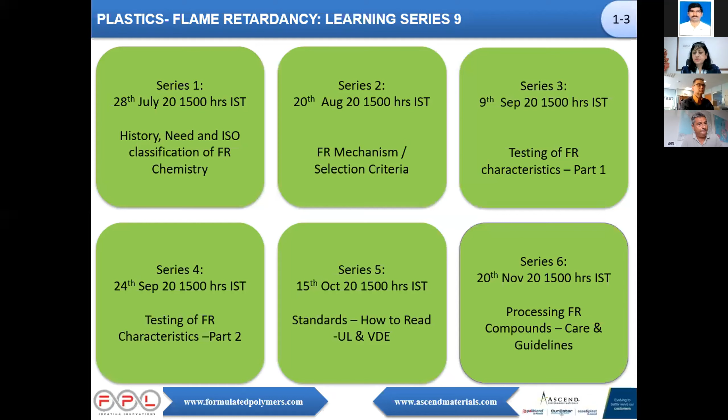This webinar, like we said, is a knowledge sharing platform for experienced professionals or professionals who are working hands-on in these specific areas. Just to do a quick recap, we have already done all these 6 series where we talked about introduction, the FR mechanism, various testing methods, the standards, the processing of FR compounds. We also had a discussion in terms of the design perspective, like what are the care or what features have to be taken into consideration when we are designing any component for flame retardant compounds.

And then the environmental impact. It's very important that we take care and ensure REACH and RoHS compliances. Possibly India is not as stringent as Europe or the US. But I think that part is going to change very soon. And since there is a huge amount of awareness which has been created, there will definitely be changes. And we see them coming. We see the coordination from various teams, systems.

This session right now is crosslink polymer FR systems, which we are discussing now. And then the next series will be on the applications, subsequently certain secondary operations, where we'll be discussing with the various team members what are the cares, precautions, and what is the process for ensuring that we have good laser marking, no color change, etc. And finally, we will be having the last session where we'll be covering the future trends in the FR system.

Just to quickly go through this, I'm covering this for the people who are attending for the first time, because we have certain participants who joined fresh. Even Miguel has joined for the first time in this session. So I'll quickly share with him what we've been doing and how he has come into the picture. We started off with the history in terms of why fire accidents happen, and why we reached the stage where flame retardant plastics are being used for certain applications. So we talked about the history, the reasons, the ISO designations. This is available on the YouTube link, so anyone who's missed out can quickly go there and see this session.

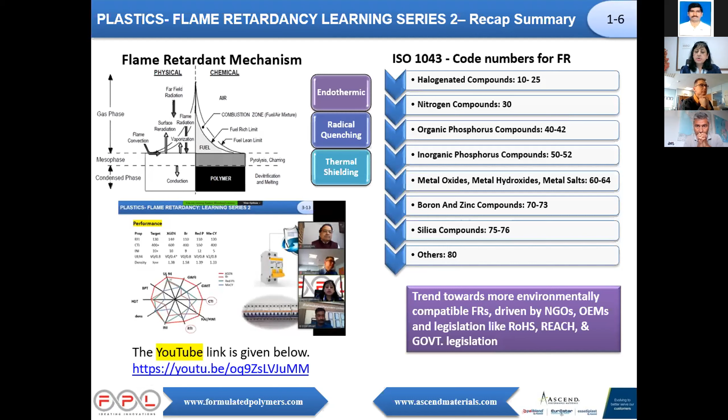The second was on the flame retardant mechanism, where we discussed various physical and chemical reactions, the endothermic, the radical quenching, the thermal shielding, basically different materials. There were different systems for flame retardancy and the trend towards more environmentally compatible flame retardant systems. So it was critical as we moved away from the halogenated systems, we go for the red phosphorus free and then move forward to the organic phosphorus or some of the other compounds which are now being used.

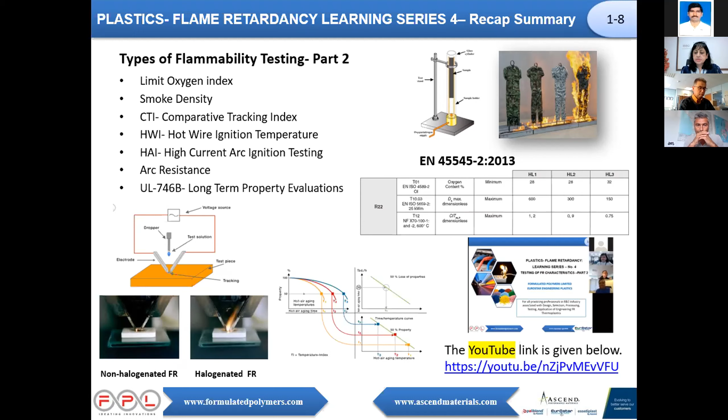Then we had one where we discussed standards. Since there is a very low level of awareness of how you read the UL, how you read the VDE cards, etc., Pankaj Chaudhary, the country head from VDE, joined and presented the session, along with Prasad Shankarappa, the UL principal engineer from Underwriters Laboratories. We had the next session where we talked about processing FR compounds: what are the care and guidelines which have to be taken into consideration when we are processing.

So how is it that our customers evaluate? How is it that the OEMs assess? And then what is important when we do the processing of the FR compounds?

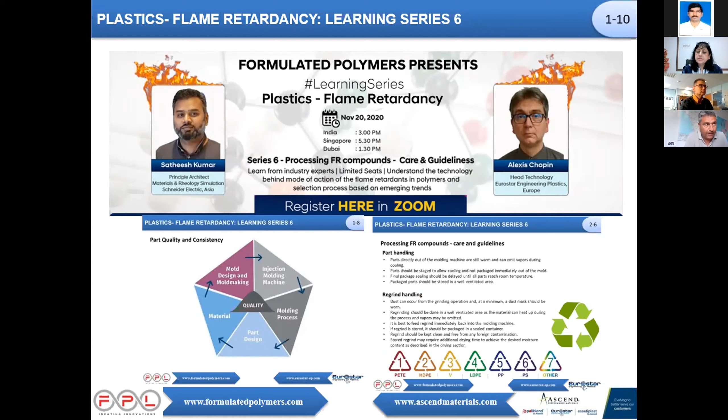Satheesh Kumar, Principal Architect, Materials and Rheology at Schneider Electric Asia, presented along with Alexis, Head of Technology at Eurostar Engineering Plastics. After processing, we had a session on the design perspective, why a particular design is important, and how with new technologies we can modify and optimize the design, looking at aspects like miniaturization.

How do we reduce weight as far as automobiles or various transport systems are concerned? So we had a session where Pradeep Chaudhary from Design Plus presented, along with Prashant Viragi, Senior DGM Plastics, L&T Division of Schneider Electric.

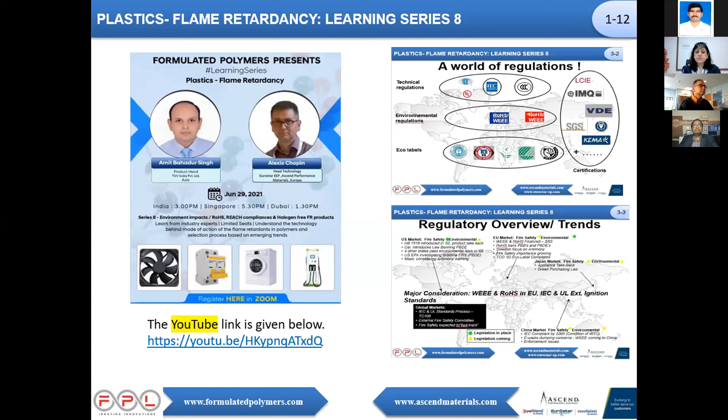Then the last session talked about regulations, a lot about REACH, ROHS, why they are important, and what factors have to be considered, especially for the export market and even the domestic market, as these regulations are becoming more and more important. Here we had Amit Bahadur Singh, the product head for TUV, presenting along with Alexis.

And now we come to the present series. This is series 9, about Crosslink Polymer FR systems. For this particular series we have 3 presenters, and cross-linking is new technology, new innovation.

We look at this in terms of our materials, the materials being used by Formulated Polymers Limited, Ascend Performance Materials, and radiation support from IONISOS. I would like to introduce the three presenters now.

The first presenter is Mr. V. Shekhar. He's a polymer engineering graduate with a Masters in Business Administration, has around 36 plus years of experience in formulation, compounding, and application development for technical parts. After a brief work experience, he co-founded Formulated Polymers Limited along with Mr. Mohan, and the rest is history.

The way the organization has grown is something to look forward to as a benchmark, growing from a small organization to one of the key engineering plastic manufacturers in the country.

He's the immediate past chairman of the Governing Council of the Indian Plastics Institute, a professional body with more than 3,000 members. He is also a Governing Council member of Plastindia Foundation, past president of the Tamil Nadu Plastics Manufacturers Association, and past Governing Council member of CIPET, the board which does testing all over India, and has research programs also now.

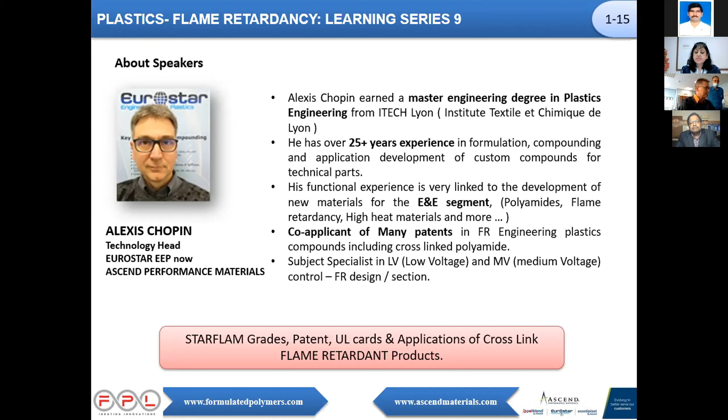He will be discussing STARFLAM grades, the patents, the UL cards which are available, and the applications of Crosslink flame retardant products.

Third speaker for today's session is Miguel Morales. He has a bachelor's degree in physics and an MBA, has over 20 plus years experience in the irradiation business, working as general manager in IONISOS, the Spanish subsidiary of the group, and now moving to the new role of sales and marketing director.

IONISOS is one of the leading European companies in the field of industrial irradiation, offering its services to plastic, medical devices, and industrial institutes as well as organizations across Europe. They have multiple locations, and Miguel will be sharing more information regarding that.

He will be discussing the principles and potential of radiation processing of polymers, and the irradiation facilities available with IONISOS. I'll now hand over the session to Mr. Shekhar to start with the presentation.

Thank you, Rashmi. Maybe I can present my paper now. Should I stop sharing? Yeah, okay, I'm stopping share. Is it visible? Yes, it's visible, but I think this is the last slide. Oh, you're starting. Okay.

Yeah, now this is it. Yeah.

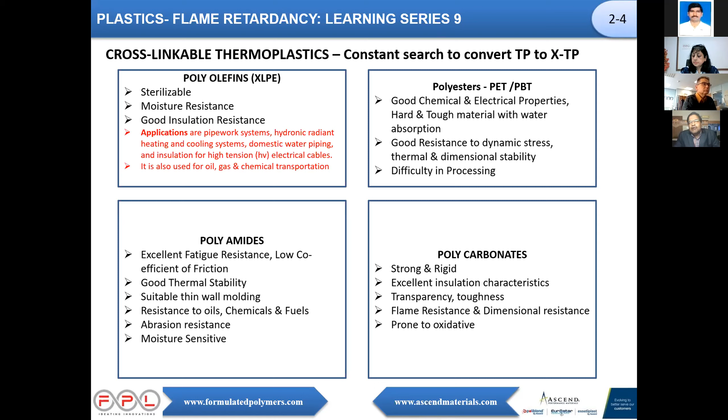The most popular method by which this cross-linking can happen is thermal, that is, by increasing the temperature, the molecule reacts and forms a cross-link. But unfortunately, the problem is this molecule will start reacting at a particular temperature, so the process window is very small, and within that time you have to process the material. If you are a little premature, then probably the gel formation will be more, and getting the required part will be very difficult.

Chemical: you can add a chemical or create a site in the molecules which can react, and by changing the pH, or in the presence of some chemicals, these cross-linkings are also possible. These were all tried earlier, but due to environmental reasons and many other reasons, these are not very popular even now.

So then radiation came, and this can be done with or without a crosslinker. The crosslinker can be inside the compound, or it can react in the molecule itself, and you can form a crosslink. There are specific energies under which these molecules will open up and form the crosslink, with absolutely no influence on processing. This is complete, like laser marking, like pad printing, you name it, like painting - it's a secondary process. You complete the process and then you can do cross-linking as a separate step.

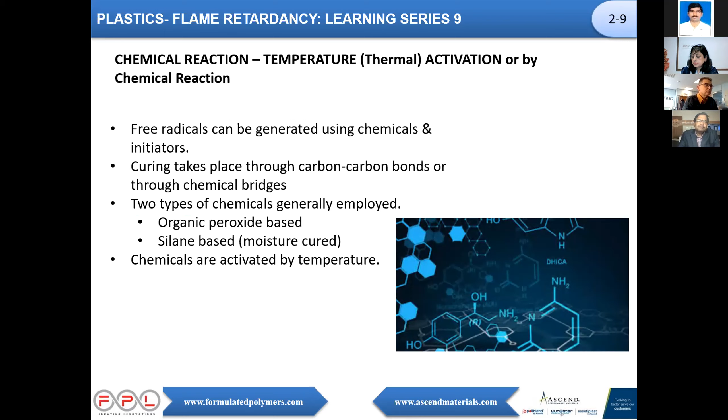Radiation - I think we have got a specialist speaker to talk about this. So there are a lot of irradiations possible, like alpha particle, beta particle, high energy electron beam, photon, neutron, you name it - I think whichever can create energy is possible. Even smaller ones like microwave, infrared, X-rays, gamma radiations are also possible to create this reaction of crosslinking.

There are many applications for which this crosslinking is being used. Maybe the common thumb rule is you want a thin part, and at the same time, the part should not melt in the application. In the application, there can be a sudden spike of temperature - you don't design for that, in the sense that no material can be designed for a very small spike, but that spike can spoil the part. And the part should be thin. If it is thin, thermosets are very difficult because they may not have the same ductility or impact as thermoplastic. Moving parts, for example in contactors, the bridges, are normally very popular in low voltage applications.

Lead-free soldering - today, with the ROHS restriction, people are giving up lead and want to go to lead-free soldering. And when you go to lead-free soldering, the temperature goes up. When the temperature goes up, the pin doesn't stay on the part. I think all the parts which have been shown here, where soldering is very important, are where you have to go for the base part to be cross-linked.

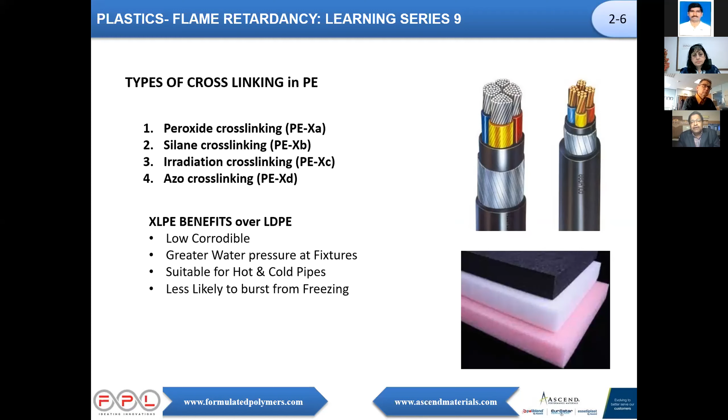And in FPL, we have FORMPOLY-X, which is a cross-linked series. And we have a few grades in nylon 6 and nylon 66, with glass, without glass, with flame retardant, without flame retardant, available. Maybe you can go to our website, you should be able to see these products.

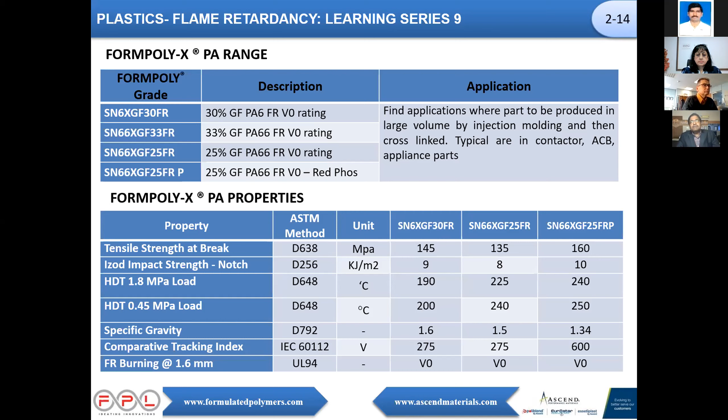And of course, we also produce STARFLAM Crosslink here with a licensing from Ascend. And there are a few customers who have started using this product in Asia in a big way now. FPL has won some innovation award for this cross-linked polyamide innovation, and we also have patents on this product for Asia.

Cross-linked polyamide from Poly X can be cross-linked using electron beam radiation, as well as by gamma radiation process. What you get out of the product is a significant improvement in RTI and multifold increase in hot wire ignition temperature, improved wear resistance, and improved chemical resistance.

The material doesn't react that quickly, even in strong chemicals. And hot pin penetration performance improves.

You can maintain most of the basic characteristics like flame retardancy. This characteristic of flame retardancy, combined with reduced creep under load because of the crosslink, allows high temperature performance above TG, and improved dimensional stability under load. So these are some of the advantages.

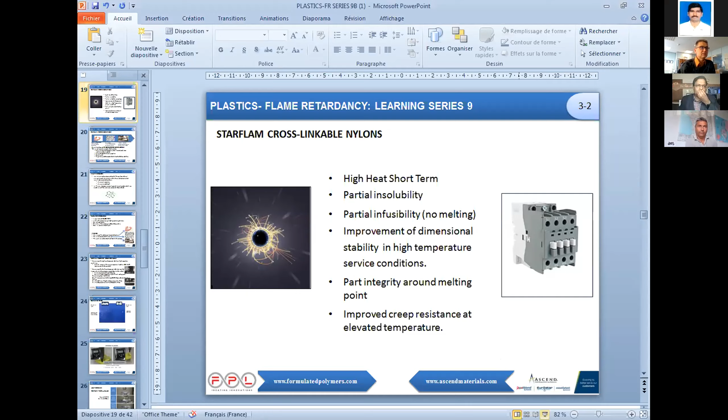So today is a practical webinar. I will share a bit of what we know, what our customers are doing, and how to work with it on a very practical level. We will not go into detail of chemistry, but what it can bring and what we can do. When customers are asking, what can we do? It's high heat, short term, extreme temperature for a short period of time, or a material that has to withstand conditions we are not forecasting in the beginning. Let's say it's the best material under failure, under extreme conditions. So what does it bring practically? High heat short term - we will see in the next page what it means.

Insolubility - in some cases it's important, especially because if you are trying to measure the solution viscosity in formic acid or sulfuric acid, you simply cannot do it because it's insoluble, and it's the way you are measuring the crosslinking percentage.

Infusibility is a real advantage in electrical application, and in some cases you have improvement in dimensional stability, especially in high temperature service conditions. It really improves the creep resistance and the integrity of the part, and it keeps the integrity of the part around the melting point, meaning it's a single material that can work so closely to its melting point. Creep resistance at elevated temperature finds more and more application, especially in automotive now.

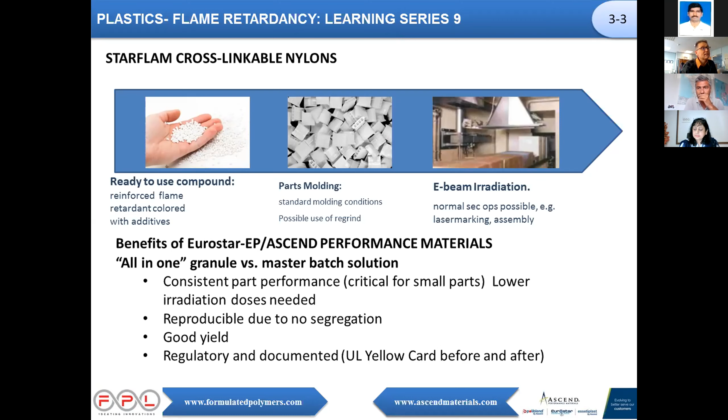The unicity of our offer is that our materials are one pack, as explained - ready to use, meaning no variation - and they are very well covered by UL certificates. UL certificate, for those not so familiar, is a kind of warranty given by an outside, independent company that certifies the performance of the material for flammability, electrical property, and mechanical property. The good thing is that they warrant this material before and after irradiation, and this gives the possibility to optimize performance and optimize cost.

So what is irradiation? What is ionization? I will not go too much into details, but basically you are bombarding your part with very high energy, and this high energy interferes with the polymer chains.

This takes place at room temperature, so it's not a very harmful treatment for the product. And what happens is that, of course, this energy breaks the chain. And there is a competition between breaking the chain and creating a network.

And the know-how of Ascend and FPL is to find also the suitable additive in a suitable amount to create this network. Meaning that once the chains are broken by the irradiation, a molecule which is polyfunctional is reacting to the entities that are created to create this network. And this is all about crosslinking.

So once more, to make things simple, crosslinking is really applied on molded parts. It can even be applied on assembled parts, meaning that if you have a box and a cover, it can be assembled. It can be made directly on packaging. So subcontractors doing the irradiation do not even have to open the cardboard box.

They do not have to manipulate it. They just manipulate the cardboard box. So it's a matter of sending them, irradiating them, and sending them back. It can be done in presence of metal and inserts.

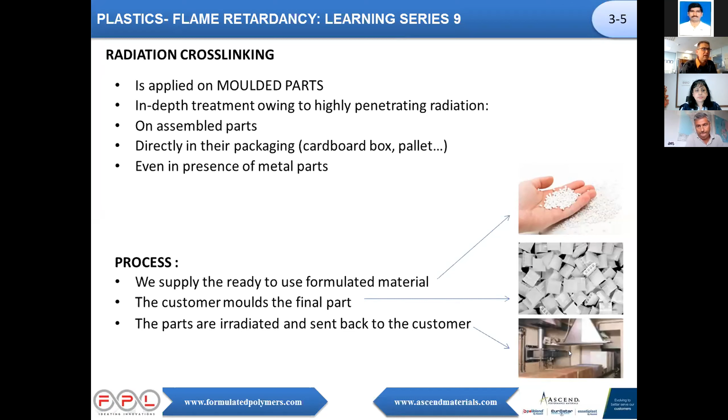So once more, supply granules in granule form, so nothing to be treated, injection normal way, and treatment normal way, and send back to customer.

So practically, how can we test that? How can we be sure that the material did react? Because basically you are not changing the shape, you are not changing the weight, you are not changing sometimes the core, you are just sending some parts outside and receiving them back.

So for this one, a very simple test is what we call the hot pin test. So basically you have this pin, which is applied to a specimen under a load at a certain temperature. To make that short: 350 degrees C, 1 kilo, 1 millimeter, and you apply it to the part.

What happens? If we see what happens on these pictures, on the left side you have a plate that has been tested, 350 degrees C, 1 kilo, and then what you see, of course, you are more than 100 degrees C above the melting point. So what happens, as you know, in plastics, once melting point is exceeded, the material melts down.

And you see here the print of the pin. It goes through the part. And if you look at the pin, the material is stuck to the pin. There is a hole formation.

And you see the same plate after crosslinking, you see that you just have a small print of the specimen, meaning that the material could withstand 1 kilo at 350 degrees C for a certain period of time without melting.

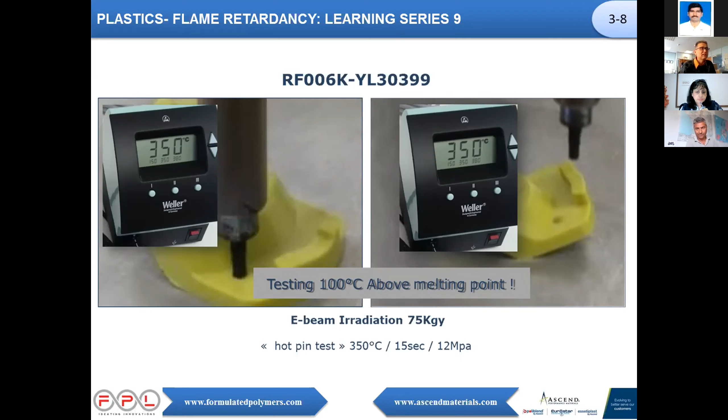So this is an industrial part on stream, and maybe you will see this small part in Miguel's presentation in a bag. Just to show that it's really high volumes, and it's important because today customers still have an impression that it's an exotic application process. It's no more an exotic process, and everybody is using it not only in appliances but also in automotive now.

So what can it bring practically to the product? Here you see a normal nylon 6/6 flame retardant. So we place in an oven a specimen that you can see here. When you place the specimen in an oven at 295 degrees C, it's still cold, you see nothing. After 1 minute, the material starts to deform. And then after 2 minutes, once heat takes up the plastic, it really melts away. Here you only have some drops of plastic somewhere.

If you take the same material cross-linkable, what do you see? If the material is cross-linkable but not cross-linked, you see that it already reacts, meaning that after 20 minutes, the material gets deformed, but it's no more in liquid form, meaning that already with the additive we place in, there is a reaction to heat. But if you cross-link the material at 100 kGy, what you see, even after 2 hours, the material gets distorted but maintains its shape. And this finds a lot of application, and it's really a clue that the material can withstand high heat for some time.

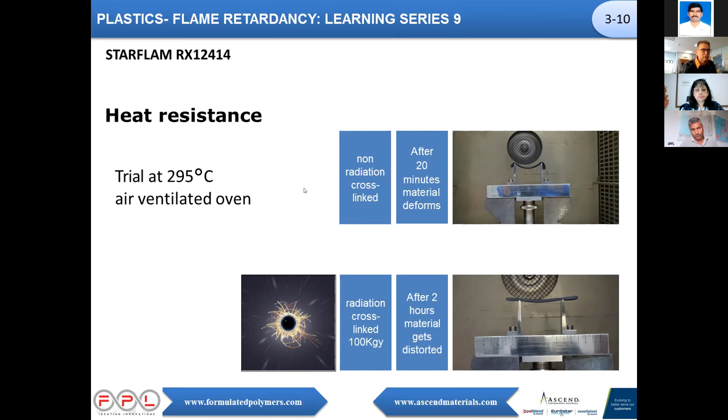Of course, we have other products which are more designed for E&E applications. This one is a polyamide 6/6 with glass fiber, flame retardant V0 with glass fiber. And you can see that you can finely tune the resistance of the material with the doses applied. You will learn in the next presentation, but of course the cost is linked to the doses applied. So you can finely tune the doses to your application just to fit the minimum of your needs to optimize cost.

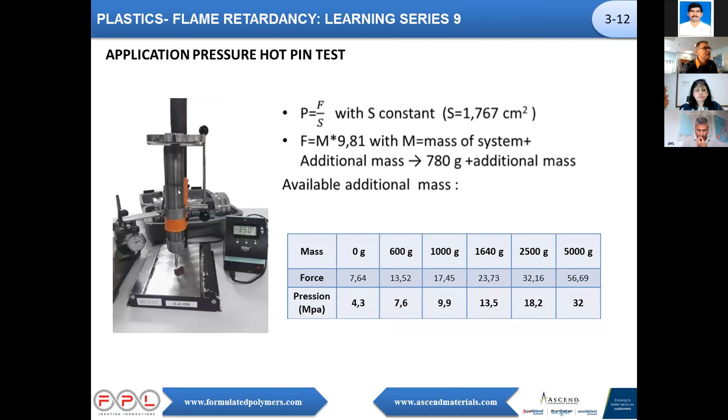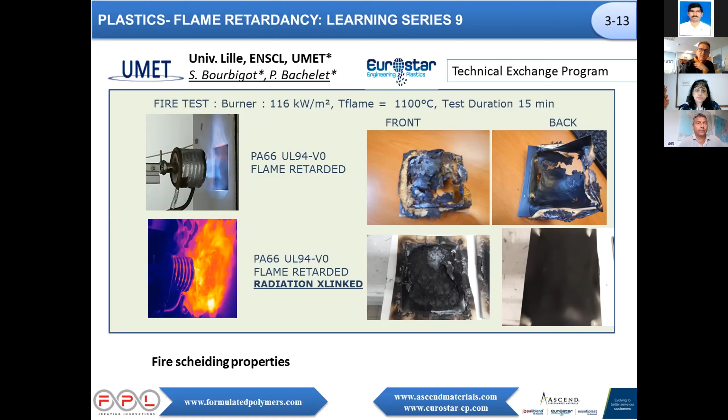Okay, so I'm already late, so I have to go fast as usual. So from this, we built a range. In our range, we have pure polyamides that are not flame retardant, just cross-linkable. We have products that are glass reinforced. We have products that are flame retardant and V0, typically for connectors. And we have some exotic materials. I will pass over them very rapidly.

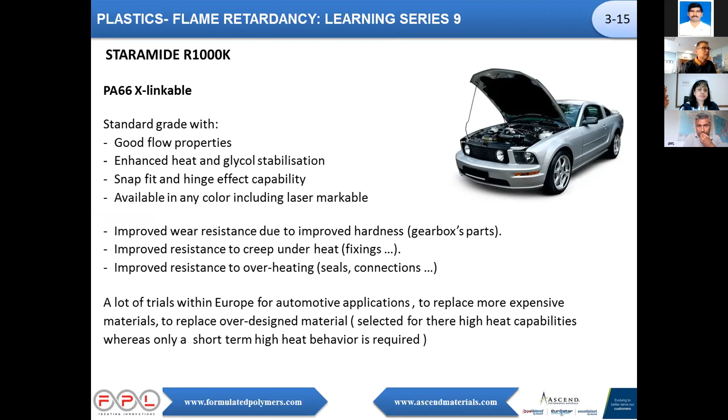So to make a long story short, R1000K, pure 6.6, just cross-linkable. Interesting if you have designed a part, for example, that needs to be quite soft. You are making some snap fit, you need a bit of flexibility, but under failure it's too hot and the material melts. This might be the solution, especially in the automotive industry.

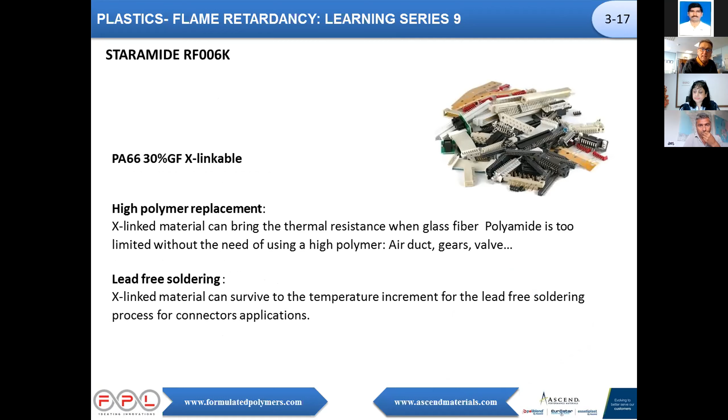Then if the material needs to be more stiff, needs to withstand more heat, more HDT, we have this polyamide 6/6 with 30% glass, which is cross-linkable, which finds use in automotive applications. But not only in automotive. You know, there are some connectors that are not flame retardant, they're only there to pass a kind of signal, but can fail under high heat. And then you can use this product too, of course.

It's important to say that it's one of the very few materials that can survive lead-free soldering, and on this one we can use snap fit and hinge. Most of the time you have to use very expensive material or thermoset, but materials that can survive hinge with lead-free soldering are not so common. And we have this one, it's very well covered by UL card, and it's in use by big OEMs for connectors.

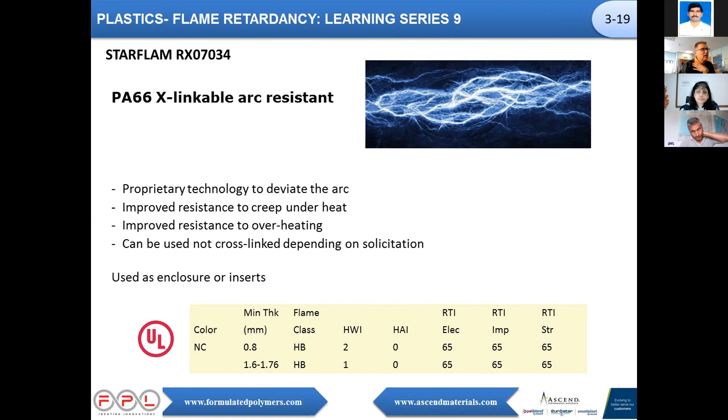Then we have this one, which is more a specialty. It's been designed mainly for arc chambers, and we take advantage of this high heat resistance, and we even designed a product that creates a kind of shield against the arc. So when the arc is bumping into the arc chamber side, you create a kind of ceramic that prevents the arc from flashing away and melting the plastics.

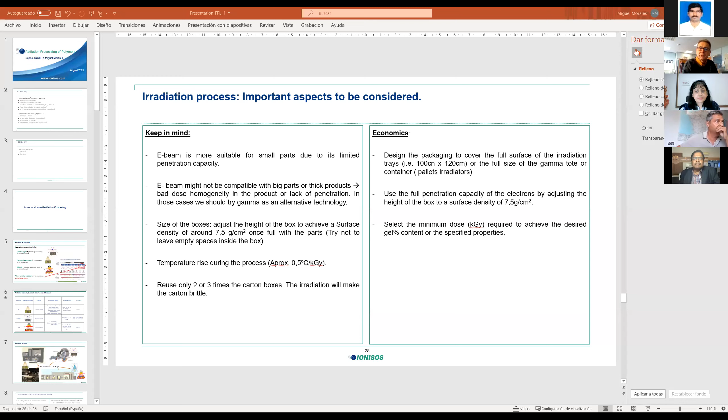Okay, so I'm almost done. I will pass over to Miguel, who will discuss the last part. And I insist, this is a very important part, because to succeed on such a project, it's a story that you cannot do alone, because you need the knowledge of people doing irradiation. You will see that even if you have a good material, if it's not irradiated correctly, you can spoil your material. So I will just pass over to Miguel.

Okay, thank you, Alexis. I'm going to share the screen. Okay, I hope that everybody can see the screen now. Is it? Yes, we can see the screen. Thank you very much. Can you put it on slideshow? It's already in a slideshow, no? Let me see. Okay, I mean, it's visible to me. I'm okay with this. Okay, I hope it's okay like that. Okay, thank you very much.

As said before, my name is Miguel Morales. I'm Sales and Marketing Director of IONISOS. IONISOS is an industrial service provider focused on the radiation business, mainly in the markets of medical device sterilization and cross-linking of plastics, pipes and tubes.

So I would like to give you an introduction about radiation processing. It covers the type of facilities and the basic interactions between irradiation and matter. After that, I will give you some information about the applications and, more importantly, the process conditions that we have to take into account to define the irradiation process of the plastics. I will finish with an introduction about IONISOS, the sites that we have in Europe, and some information about the company. So, okay, let's start.

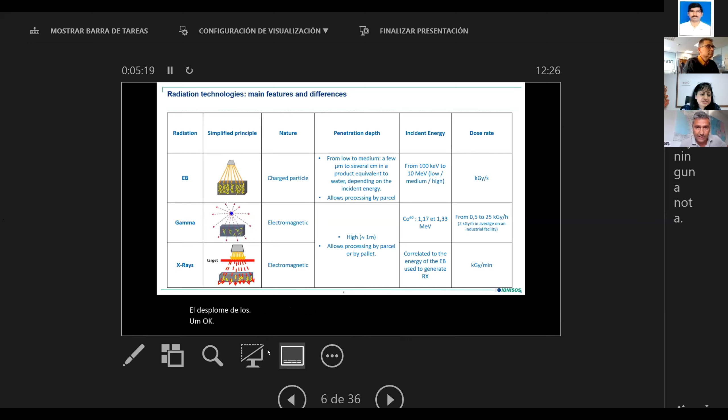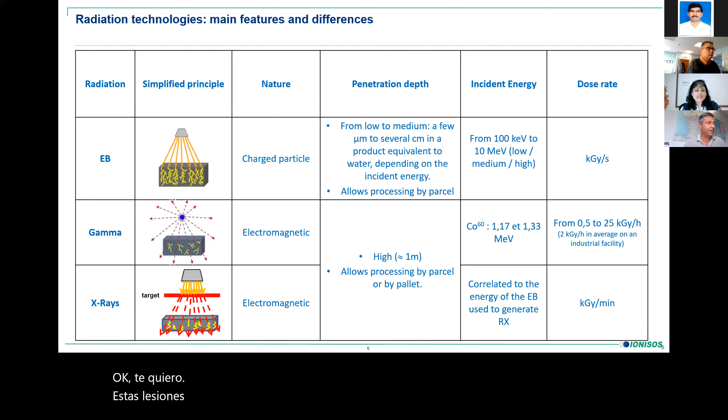Just a minute, Miguel, can you stop the translation which is coming at the bottom so that the screen is a little bit bigger? I'm getting a request from the audience. If you can just remove that translation, I think the screen will be a little bit bigger. Okay, let's see. Now we've gone to slide sorter. You'll have to go to slideshow. I'm going to start again. Yeah, now it's very clear. Okay, good, thank you. I don't know if the translation is still there or not. No, it's still there, but the screen is bigger. Okay, good. So let's continue like this. Let's see if I can move.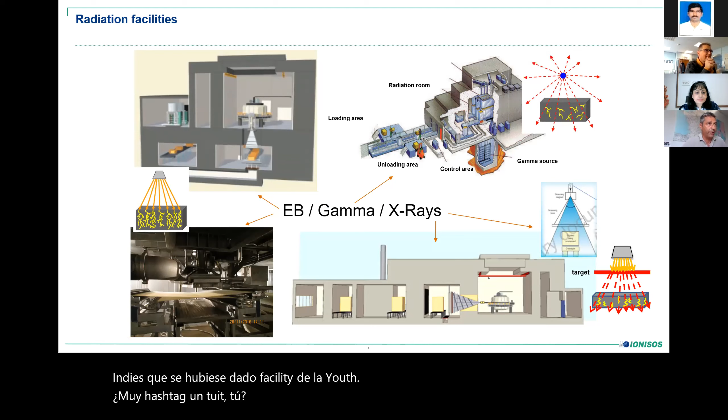So the next slide. We have the layout of the different facilities. In this case, we can say that all facilities have the same layout. We have a concrete cell in which we are going to place the radiation source, the electron beam or the cobalt, and the treatment area. This concrete cell will act as shielding. We are going to keep all the radiation inside, so the people around the facility can access it freely.

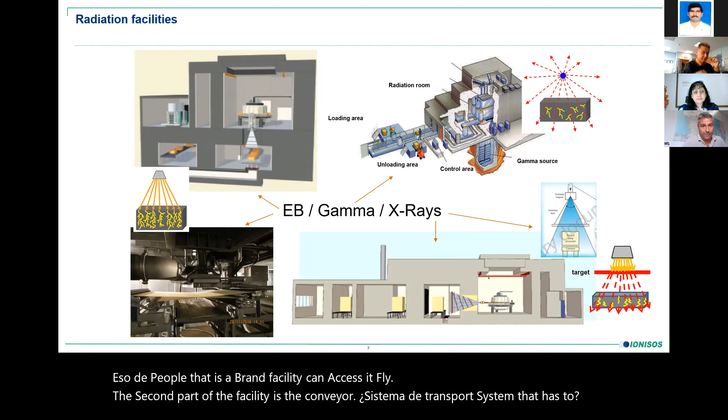The second part of the facility is the conveyor system or transport system that has to transport the product to the treatment area. In this case, we can have a tray conveyor, pallet, or overhead conveyor, depending on the type of facility, or a continuous product treatment system, which is used for the treatment of cables and pipes. In this case, we have a drum, unwind the cable, pass it under the beam, and then wind it back after the treatment.

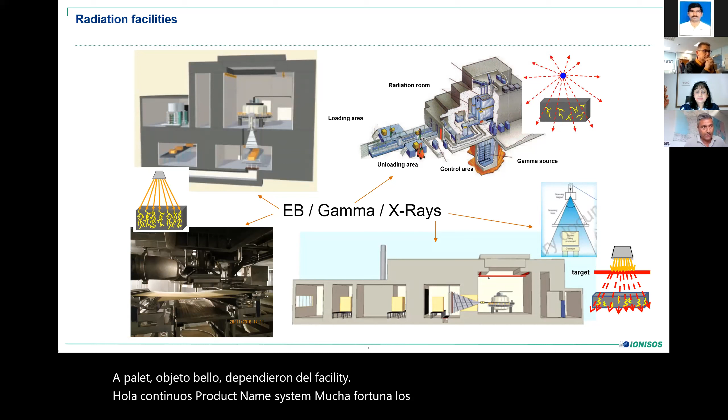Now, if we look into the interaction between the radiation and the materials and the plastic that we want to treat, we first of all need to say that the energy of the irradiation we are dealing with is only enough to interact with the electrons of the atoms and molecules. As this energy is limited, we cannot interact with the nucleus of the materials. This is important to understand, as there is no induced radiation during the process.

Once we have this clear, we are going to be able to ionize the atoms, and through this ionization, we generate free radicals that will react with other free radicals in the product. We can have polymerization, curing, crosslinking, or grafting, depending on the type of polymer.

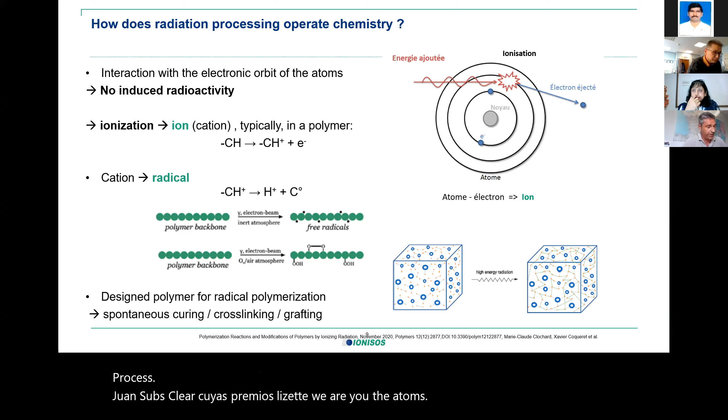The main applications are related with crosslinking in any case. Also, it's important to say that there is no need to use chemical photosensitizers. The radiation will be the initiator of the reaction. This technology is compatible with a wide range of molecules, and these are permanent changes. Once we have modified the structure of the polymer, these changes are stable, so the properties will remain.

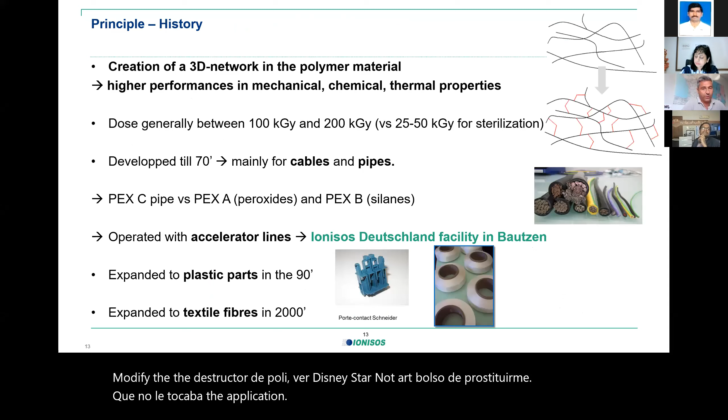Okay, now let's talk about the applications that we can have with these technologies. Just a little bit of history about this technology. Let's focus on crosslinking, as I said before, because it's the main application.

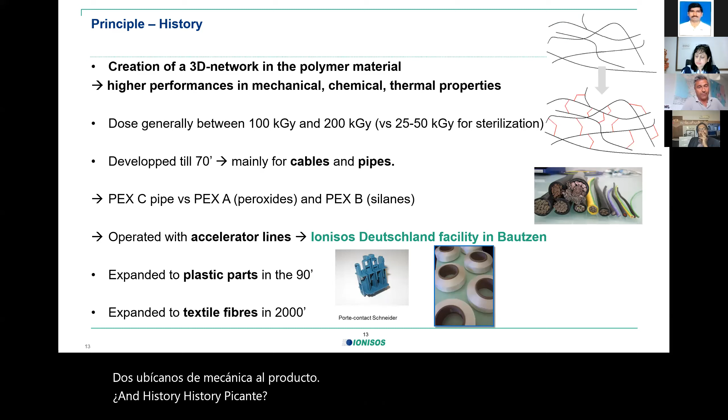The doses that we are going to use are between 100 and 200 kilograys, depending on the plastic, the application, and the results we want to obtain. We mainly look to improve chemical and thermal properties, though we can also improve mechanical properties. This technology was developed in the 70s to treat cables and pipes, as the treatment of polyethylene pipes by irradiation was an alternative to other existing methods to crosslink pipes, such as peroxides and silanes.

The technology and applications expanded in the 90s to individual parts. This came also through new e-beam sites with tray conveyors that were able to treat boxes and individual parts. The last application, just to give you some examples, is related with textile fibers. In this case, we treat polyolefin-based fibers to improve their chemical and thermal properties.

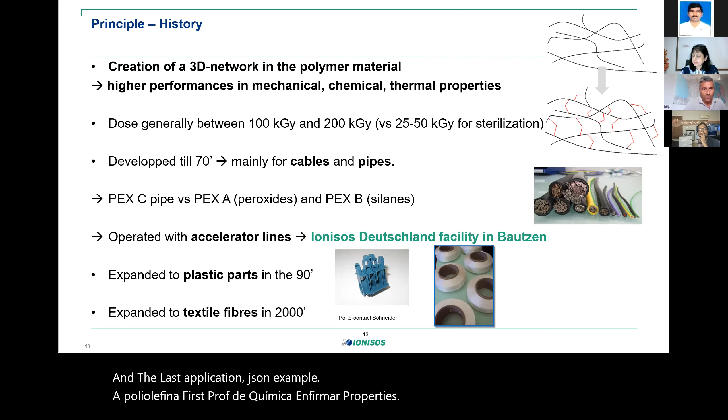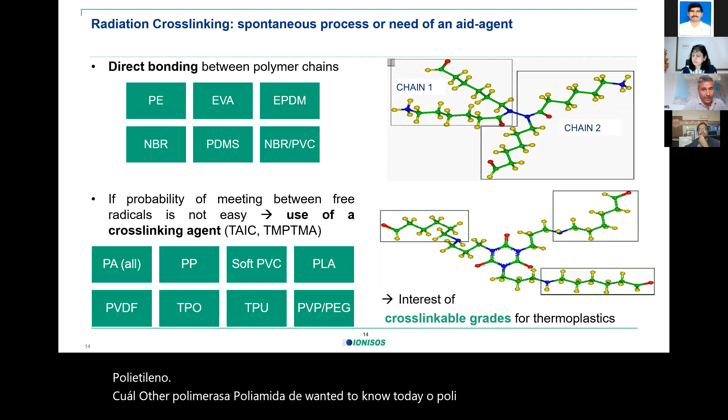It's also important to understand that some of the polymers compatible with this technology will cross-link naturally, without the addition of any additive. Those polymers are, for example, polyethylene, while other polymers such as polyamide, which we're talking about today, or polypropylene, will need an additive, an agent, to be able to cross-link. This is an important point to understand also.

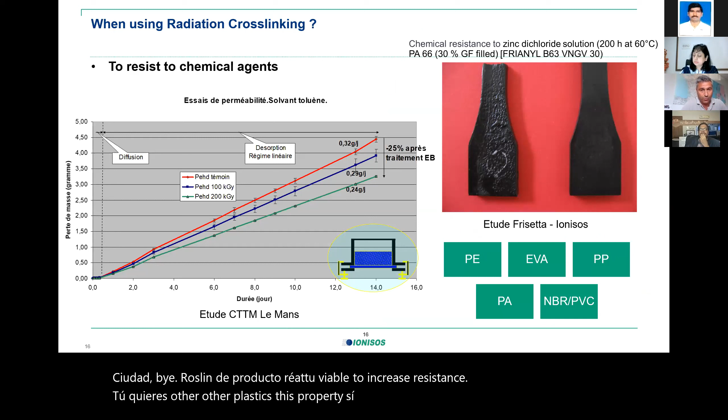The first property we have identified here is chemical resistance improvement. By cross-linking the product, we are going to be able to increase the resistance to chemicals of polyethylene and other plastics. This property is applicable to packaging materials, for example, if we want to contain solvents, gasoline, or oils. It will help us to have a packaging material made of polyethylene or polypropylene, for example.

The other important property we are looking into is thermal resistance. Here we have an example of a polyamide that we irradiated by E-beam and by gamma to the same dose, and you can see how the plastic parts that were not cross-linked are not dimensionally stable to temperature, while when we irradiate the parts, it makes a big difference, and the part is quite stable at high temperatures.

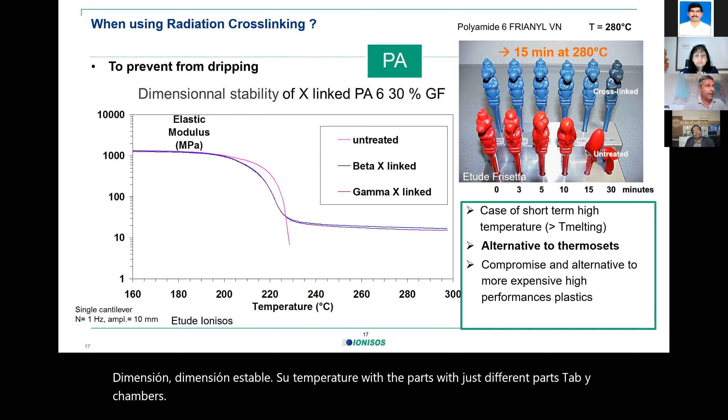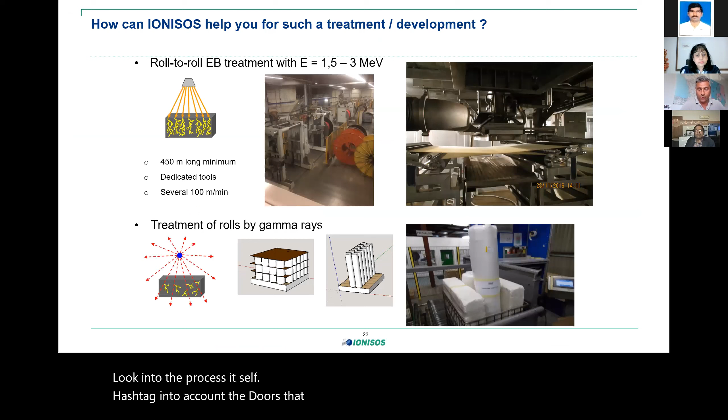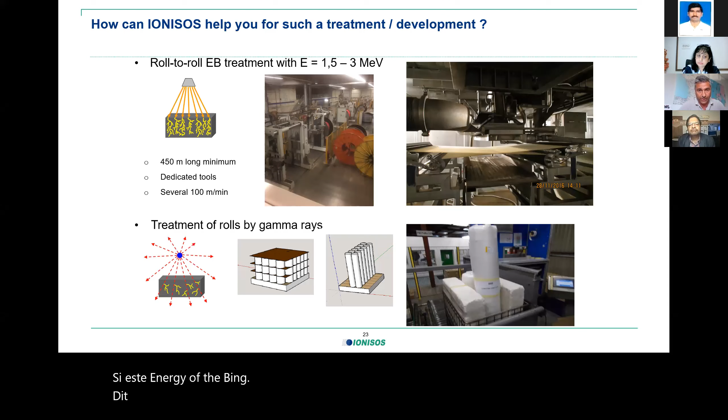If we look into the process itself, we have to take into account first the dose that we need to deliver to the product. To achieve that dose, we need to deal with several irradiation parameters. The first one is the energy of the electrons. Let's focus on E-beam because it's the more used technology. This energy will determine the penetration capacity and also the dose we can deliver to the product. The second parameter is the speed at which we are going to expose the product.

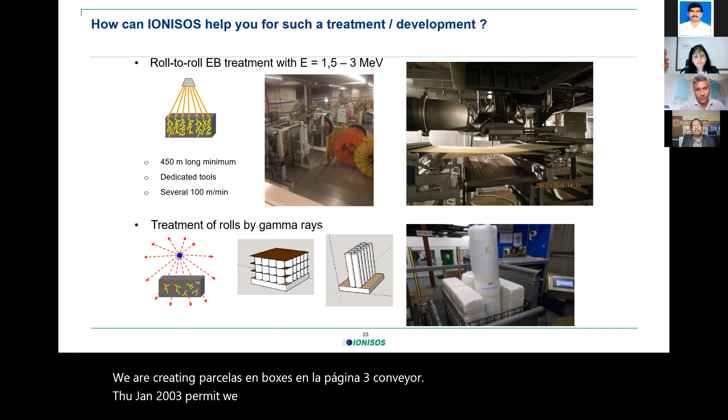This speed can go, for example, from meters per minute when we are treating parcels and boxes in a tray conveyor, to hundreds of meters per minute when we are treating in continuous mode cables or pipes. The other important parameter is the scan width. We need to adapt the scan width of the beam to the width of the product, the width of the tray, or the number of passes of the cable under the beam.

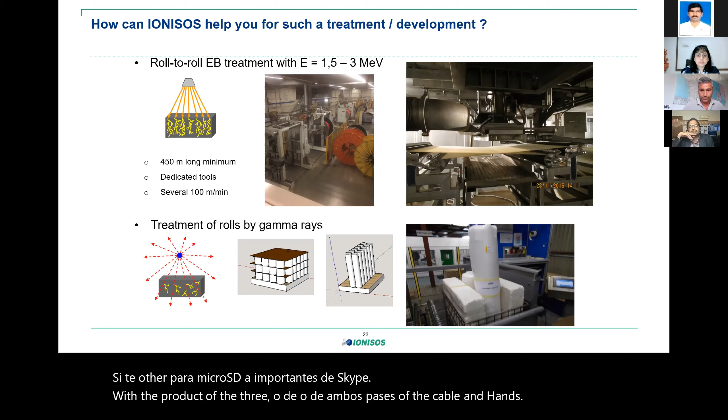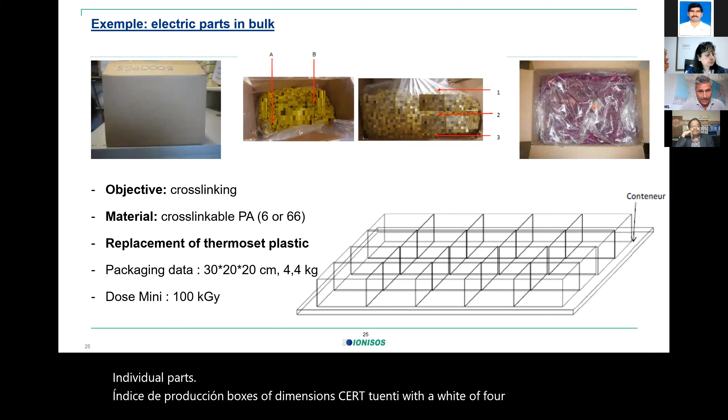Here we have an example that we can look at in more detail. Here we are cross-linking some individual parts made of polyamide. In this case, we receive the products in boxes of those dimensions, 30 by 20 by 20, with a weight of 4.4 kilograms each. So in this case, the target dose can be 100 kilograys.

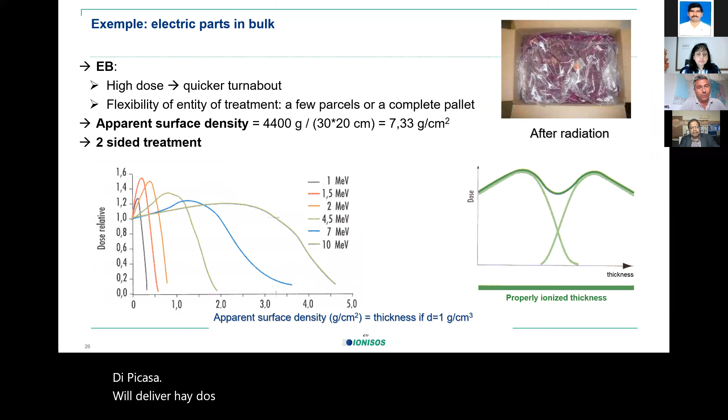As you can see in the diagram, we have placed the boxes we are going to treat on an irradiation tray. We are using E-beam, as indicated before. The E-beam will deliver a high dose rate, so the treatment will be quite quick. This means that the product will be under the beam for several seconds.

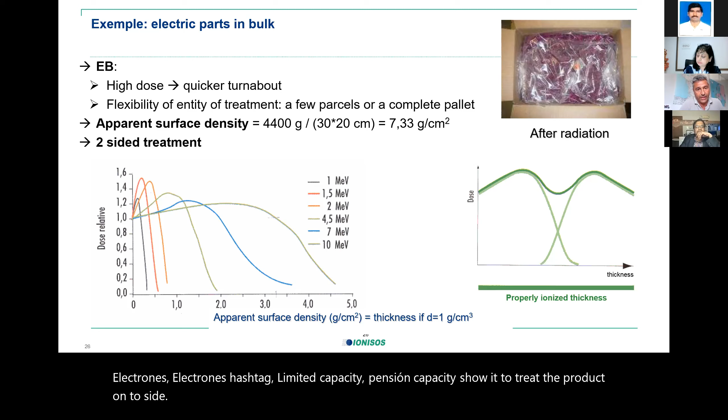Also, we are treating with electrons. These electrons have a limited penetration capacity, so we will need to treat the product on two sides. This means that we will have to turn the product 180 degrees to be treated on two of its sides, to have a complementary dose profile, as you can see in the graph. The dose will be a combination of those two passes.

As a thumb rule, the maximum surface density that we can treat is around 7.5 grams per square centimeter, due to the limited penetration capacity of the electrons. Also, because of this, the type of profile - the way the electrons will deliver the dose in depth - we will have some uniformity variation in the dose inside the product.

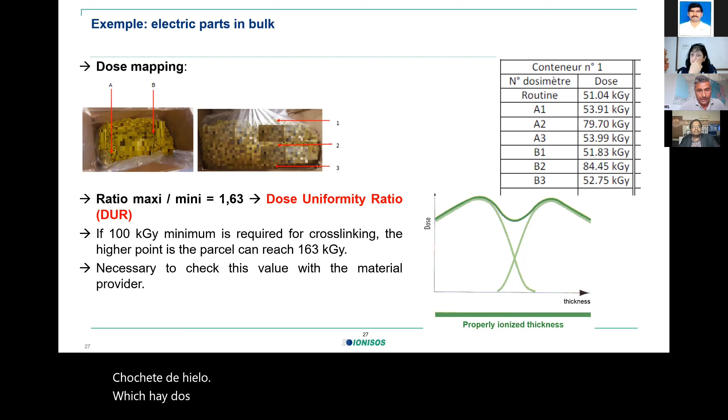This means that if we are targeting a minimum dose of 100 kilograys, because it's the dose we need to achieve the desired gel percentage content, we will have other parts in the box that will reach a higher dose, in this case 163 kilograys. This means we will need to check that the maximum dose is also acceptable for the product, and that the properties of the products are sufficiently homogeneous. It's an important point in the process.

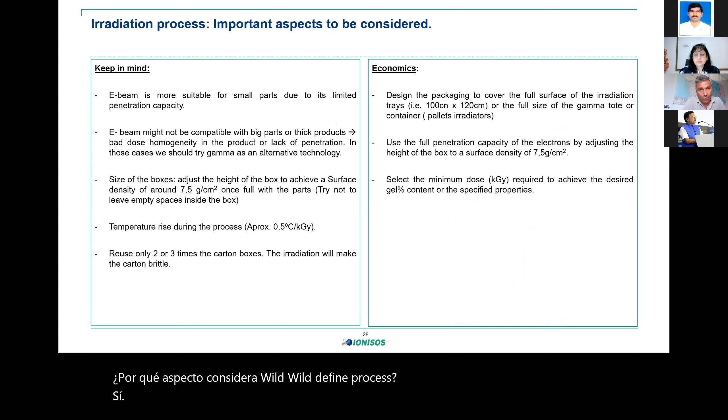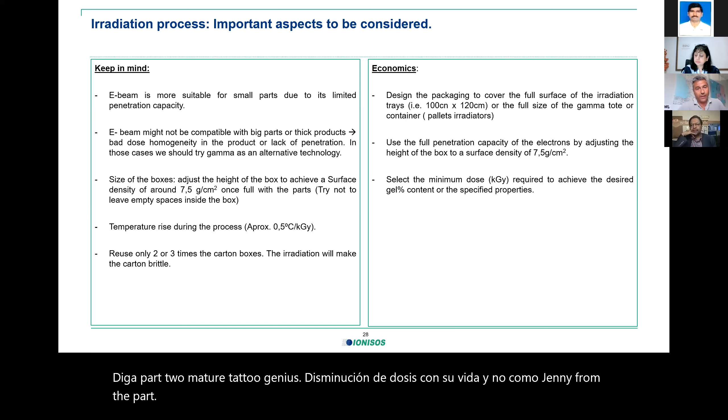Just to give you some important aspects to consider while defining the process: it's important to know that E-beam is more compatible with small parts due to their limited penetration capacity. We can also treat bigger parts, but we need to make sure that the process is going to be homogeneous. This means that the dose is going to be sufficiently homogeneous for all the parts when these parts are big, and also that the penetration capacity of the electrons is able to treat the inner parts of the product.

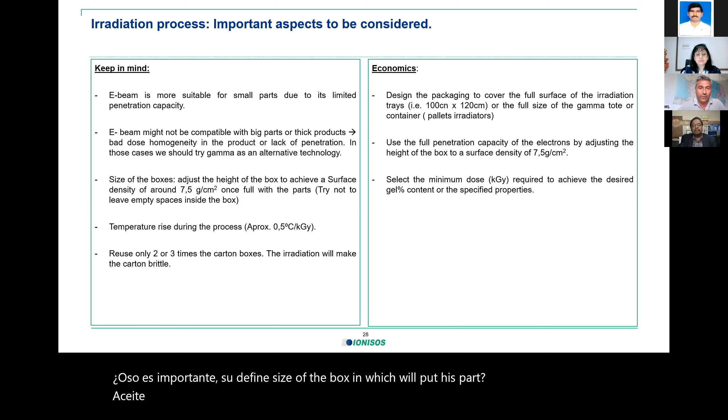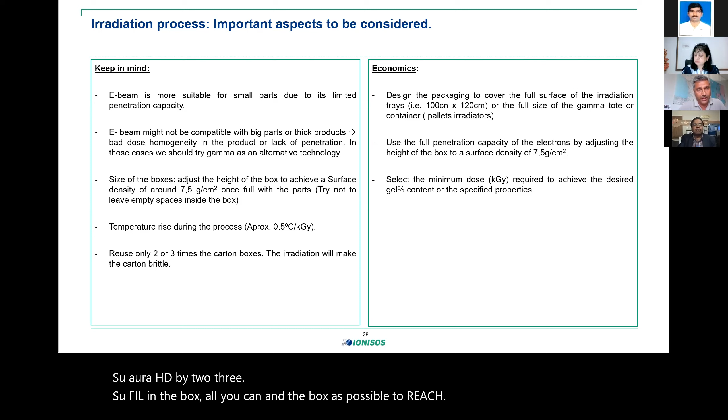Also, it's important to define the size of the boxes in which we are going to put these parts. As said before, the maximum penetration capacity of the electrons is 7.5 grams per square centimeter. So our advice would be to try to fill the box as much as you can and make the box as high as possible to reach that surface density, and don't leave empty spaces in the box if possible.

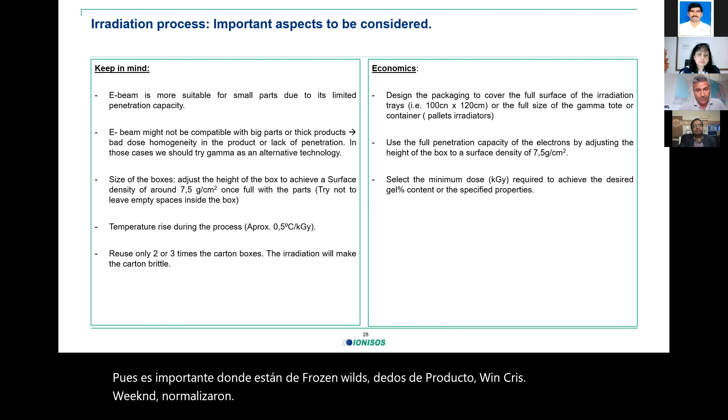Also, it's important to understand that the dose delivered to the product will increase the temperature of the parts a little bit. It will depend on the heat capacity, but our experience tells us that the temperature will increase around 0.5 degrees for each kilogray that we deliver. So this means that normally we will deliver the dose, which is usually around 100 kilograys, in several passes. We don't want to deliver all the dose in one pass because the increase in temperature would be too high. So normally we are looking at around 4-6 passes of treatment.

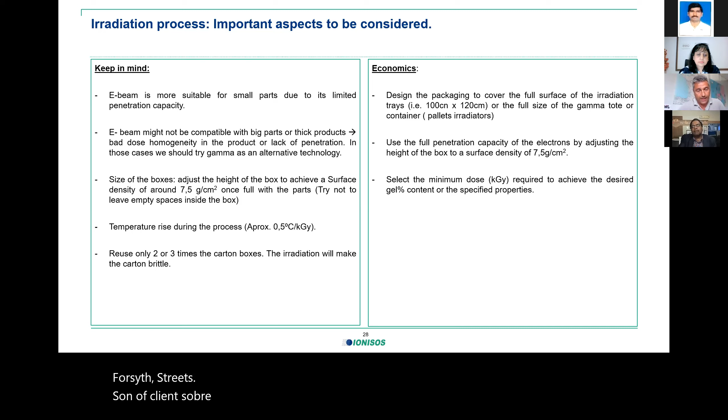Some of our clients also reuse the boxes. Our advice is not to reuse them more than 2 or 3 times, because the carton will get brittle and then we will have problems with the levers and so on - boxes breaking and so on.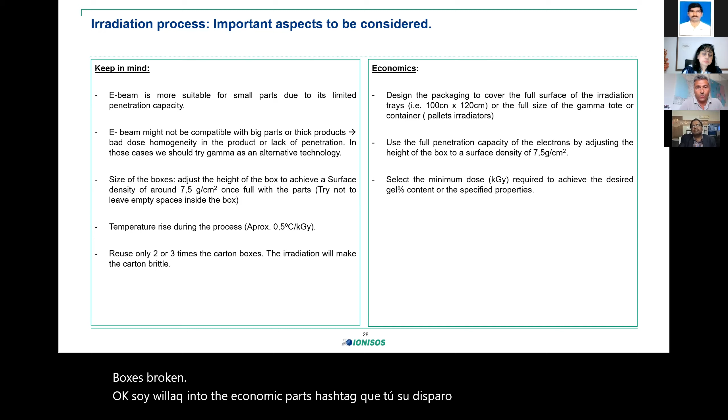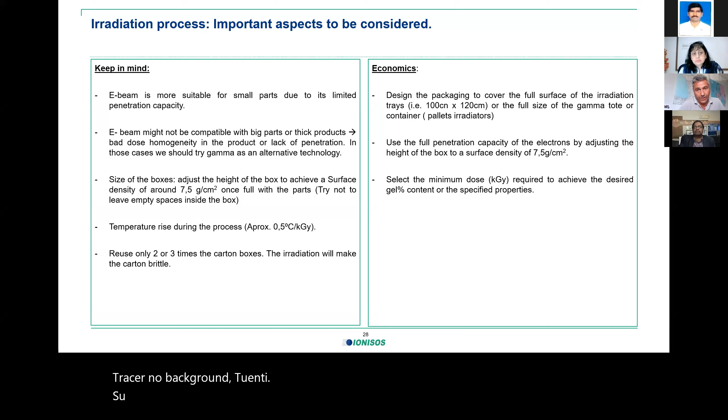Okay, so if we look into the economic part, just to give you some ideas on how to improve this, we would advise also to design the boxes to fill in the irradiation trays or the gamma tote conveyors completely. Just to give you an idea, the irradiation trays are normally 100 centimeters by 120, so make your boxes multiples of this surface so we can fill in the tray as much as possible. And the same for the irradiation containers in case of gamma.

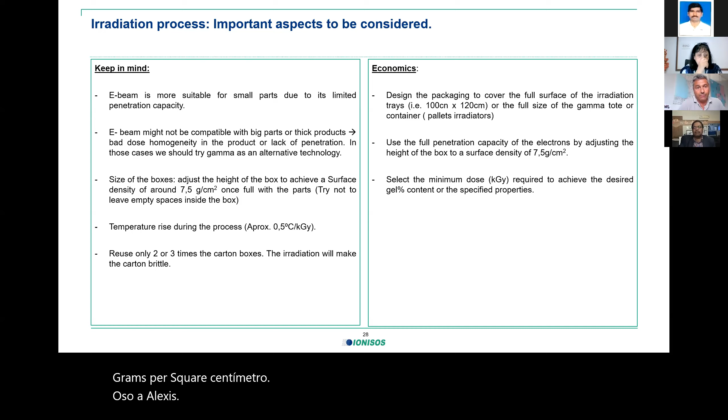Try to use also the full penetration of the electrons, so try to reach that maximum surface density of 7.5 grams per square centimeter. And also, as Alexis said before, try to select the dose that is needed. Don't overdose the product. If you know the product will reach the right specification with 75 kilograys, let's target that dose. Don't go more than that.

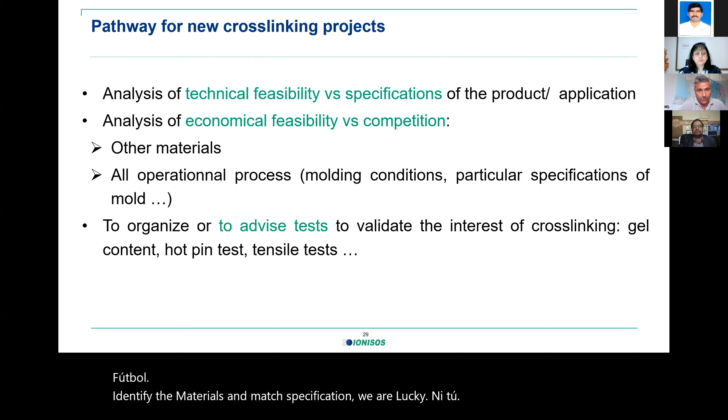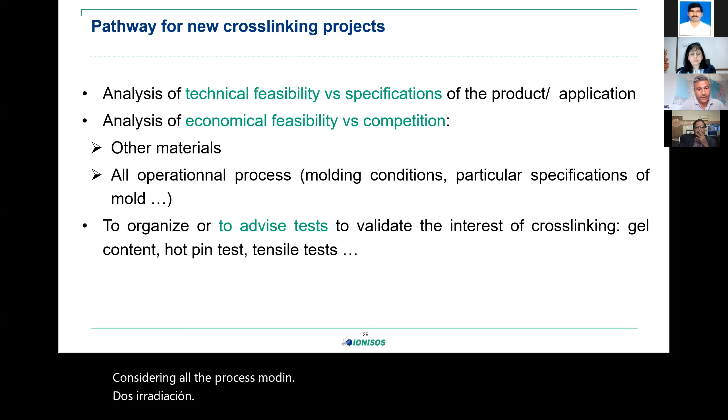Okay, and just to finalize this part, every time that we want to put in place one crosslinking project, first of all, as we have seen before, we need to identify the materials and the additives that we need to use that will match the specification we are looking into. There is also the need to do an economical feasibility study in comparison with other materials, taking into account and considering all the process - molding, logistics, all the irradiation, everything involved in the process. And once all that is clear, then we will need to define some trials. These trials will give us the final answer about if the process is possible, and will also give us the right dose that we will need to use to treat the product.

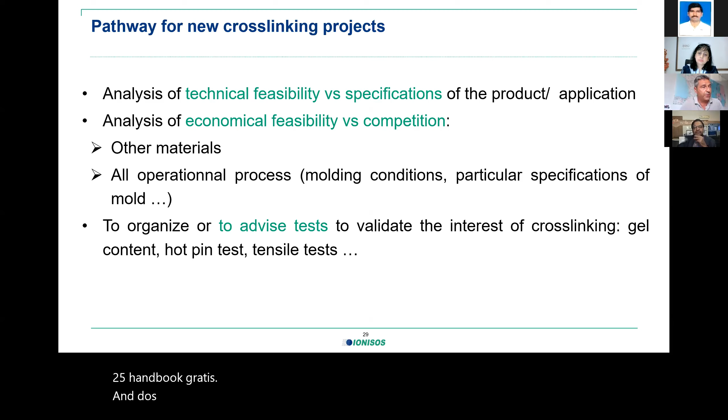What we normally do is we treat several samples to different doses, for example 50, 75, 100, 125 kilograys. And with those samples, we plot some curves about the changes in the properties and the gel content to identify the dose that is needed for the process.

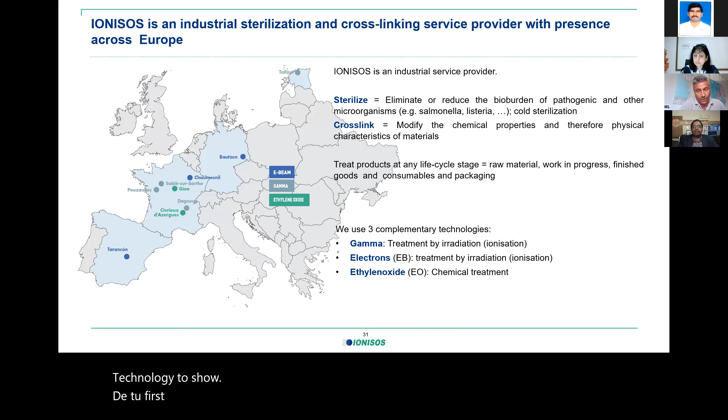Okay, so this is for the irradiation applications, and now just a short overview about IONISOS. As said before, IONISOS is an industrial sterilization and crosslinking service provider with facilities in Europe. We have these two businesses, sterilization and crosslinking, and we use 3 technologies to do so. The 2 first technologies that we use and that are compatible with crosslinking are gamma plants and electron beam. There is a third technology, which is ethylene oxide, a gas that is only usable for the sterilization of medical devices.

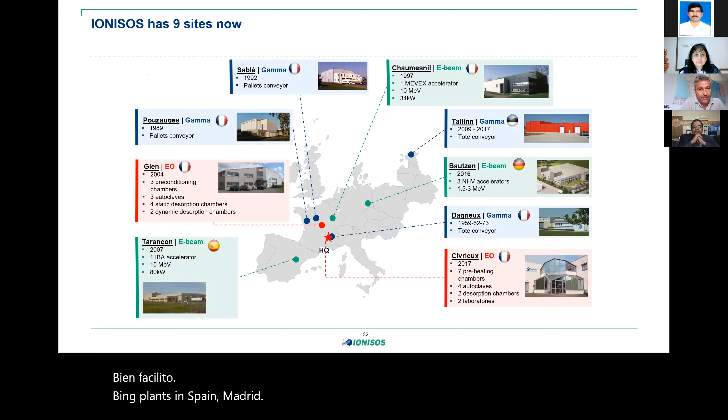These are the facilities we have in Europe. If we look into the e-beam facilities, we have an e-beam plant in Spain, close to Madrid, in a town called Tarancon. It's a 10 MeV plant in which we cross-link parts in boxes and fibers in this case. And we have another e-beam plant in Chaumesnil in France. In this case, the same as in Tarancon, we are able to cross-link individual parts that are delivered to us in boxes with a 10 megaelectron volt machine.

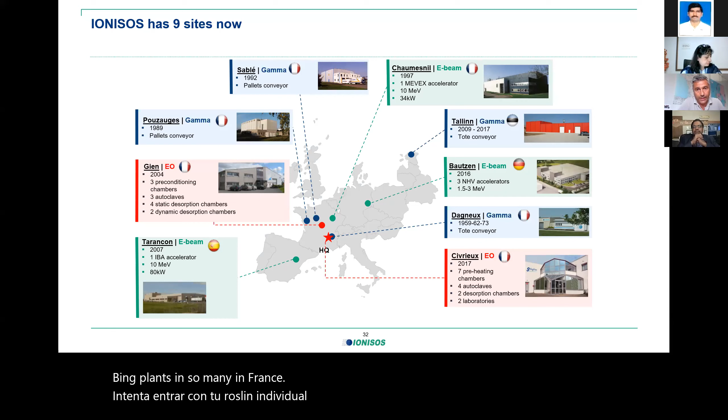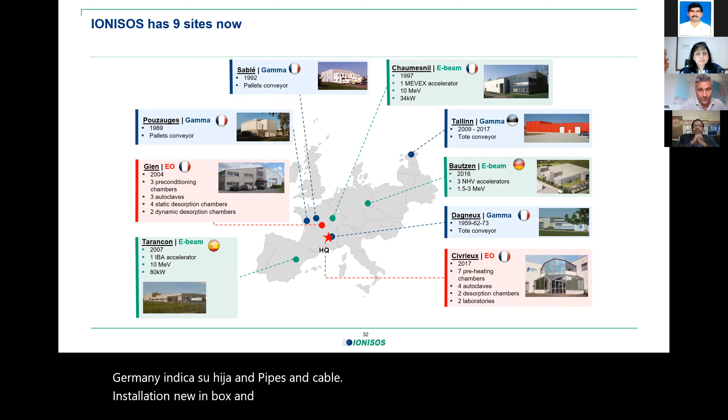And the third e-beam plant that we have is the one in Bautzen, Germany. In this case, we have an underbeam system that is designed for the treatment of pipes and cables - that's all we treat there. Just to give you an idea, we have installed a new e-beam in Bautzen some months ago due to the high demand in this sector. We are also receiving requests for cross-linking parts in our plants of Chaumesnil and Tarancon quite often, and it's a growing activity for us.

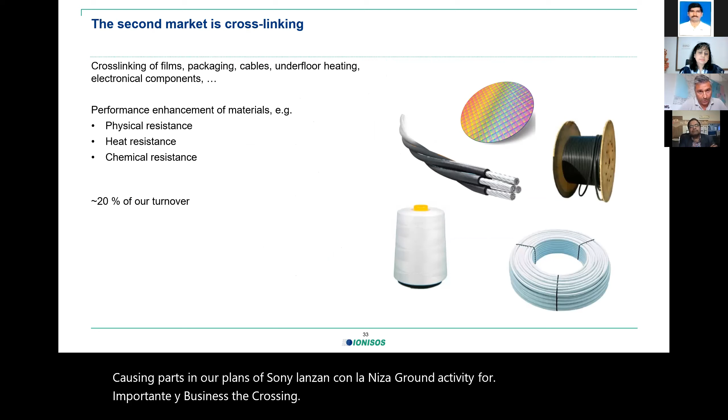Just to give you an idea of how important this business is for us, the cross-linking business is around 20% of our sales in all Europe. And here you have some of the products that we normally treat: fibers, pipes, cables, and so on. The other 80% is dedicated to medical devices sterilization.

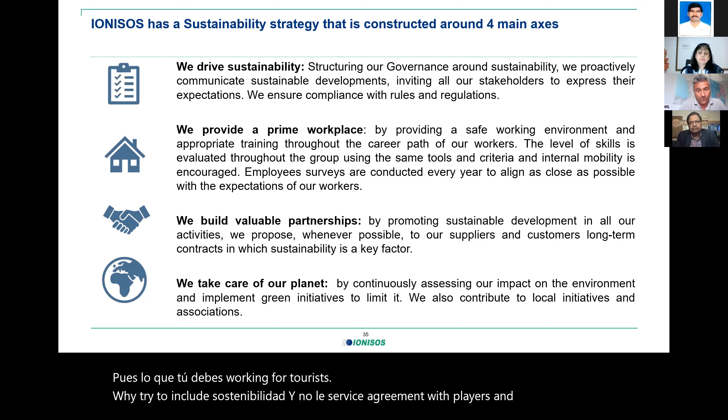And just to finalize, just to tell you that in IONISOS we have a sustainability strategy in place that we deploy around 4 axes. We have included sustainability in our governance and communication. We are always looking to provide the best working place to our employees. We try to include sustainability in all the service agreements that we have with suppliers and clients as a key factor, and also we measure our carbon footprint, put in place actions to reduce it, and contribute to local activities and associations.